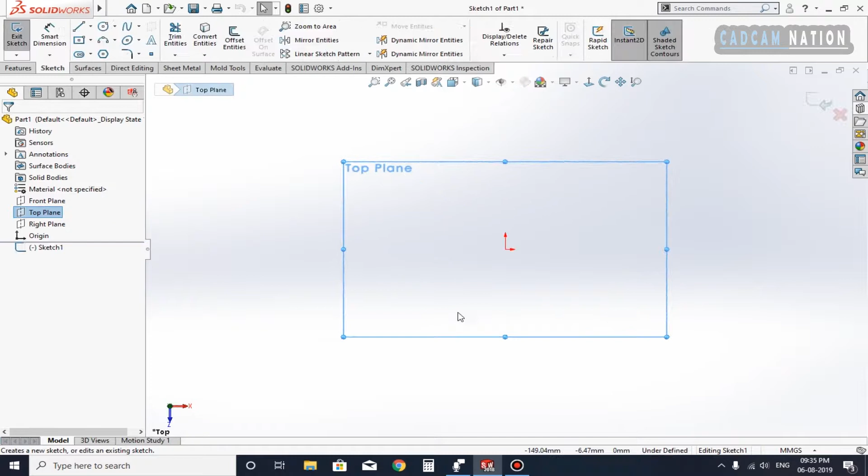As you can see, I'm in the SolidWorks interface. As you already know how to start it, I'm going straight to the tutorial part. On the left side you can see there are front, top and right planes. There is a top plane, I'm going to select it, and there is the sketch option available. Click on it, it will align to your normal view.

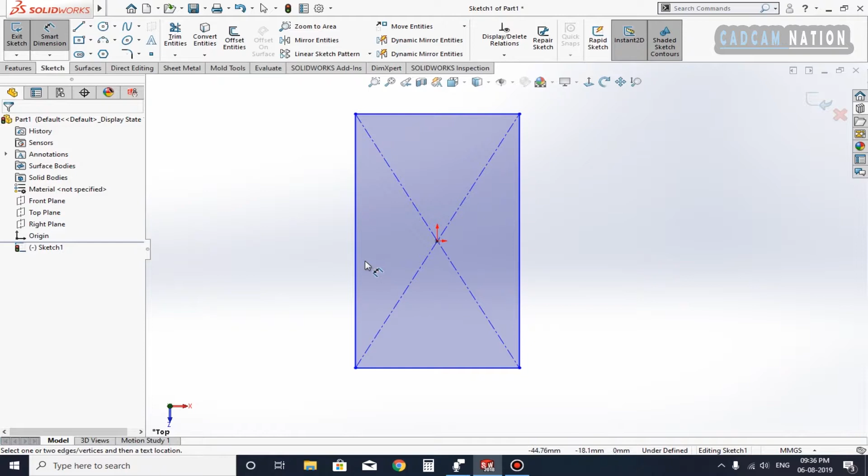The first type of joint I'm going to show you is the half joint. For doing this, I'm going to use the sketch option, and using the rectangular feature, click from the center and draw outwards. Then give the dimension - there should be a horizontal dimension over here. I'm giving it 24 millimeter.

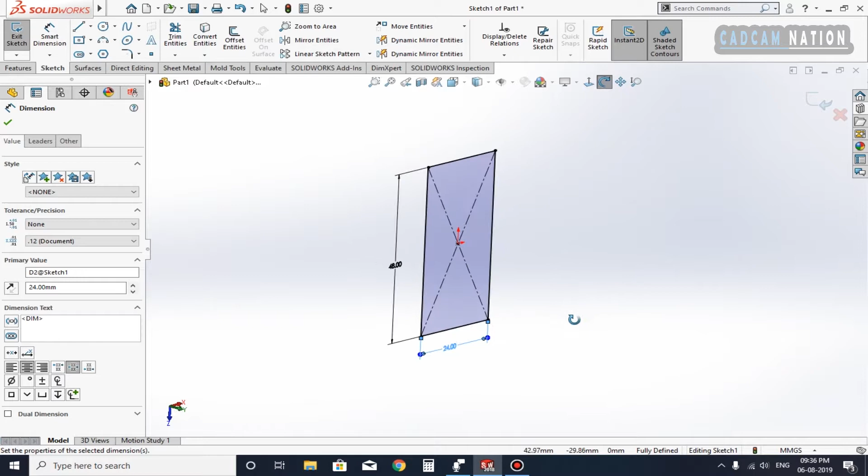This is the basic foundation of this sketch. I'm going to extrude this feature, so go to feature and extrude it, extrude this equals to 80 millimeter like this, and click OK. Now we have the wooden piece.

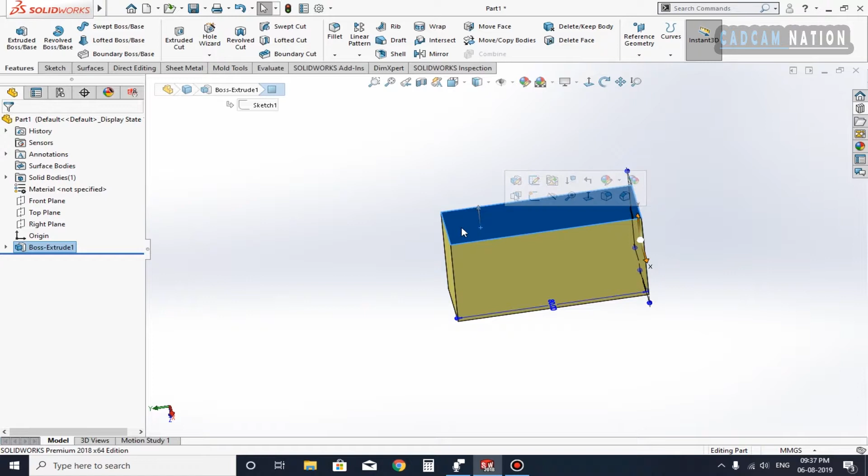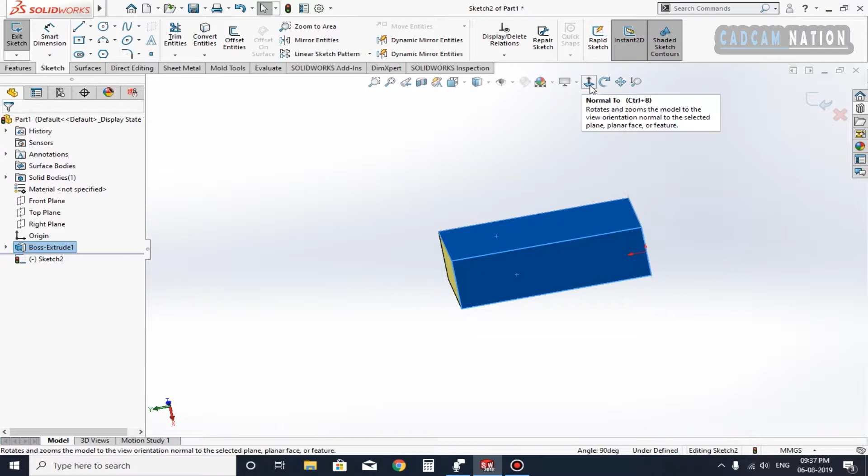Start on the surface, click on this surface and click sketch. One more thing - when you hold down the control key and click the surface which you want on your side, and the other surface which you want on top, then hold down the click and select this surface, and when you click onto normal, it will normal as you want.

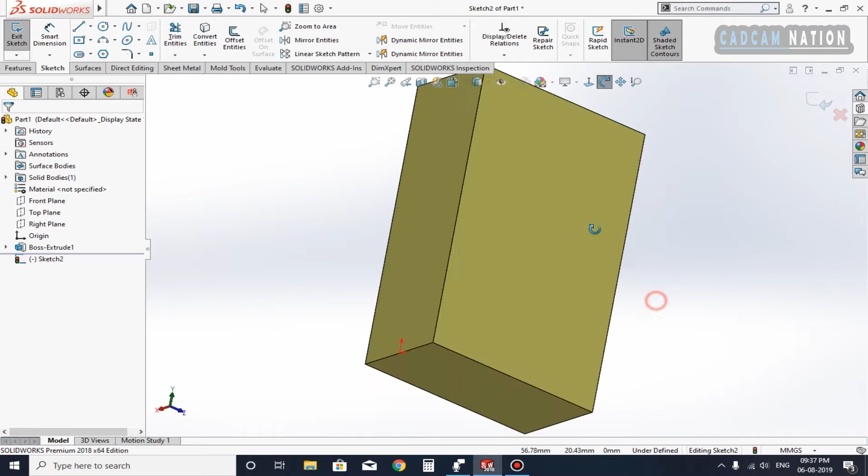No matter the orientation of the origin, you can also change the orientation of the sketch according to your requirement. Select the surface by holding down the control key, and the second surface which you want in upward direction, then click like this. I want to make it horizontal, so click like this and make normal to view.

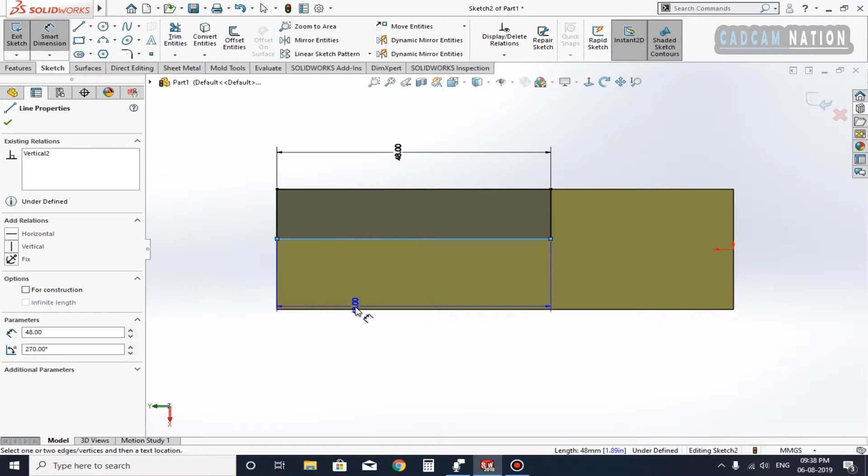I'm going to start over here, make a rectangle from this corner like this, give the dimension equals to 48 millimeter, and the thickness of this cut is going to be equals to the leftover material, exactly 12 millimeter.

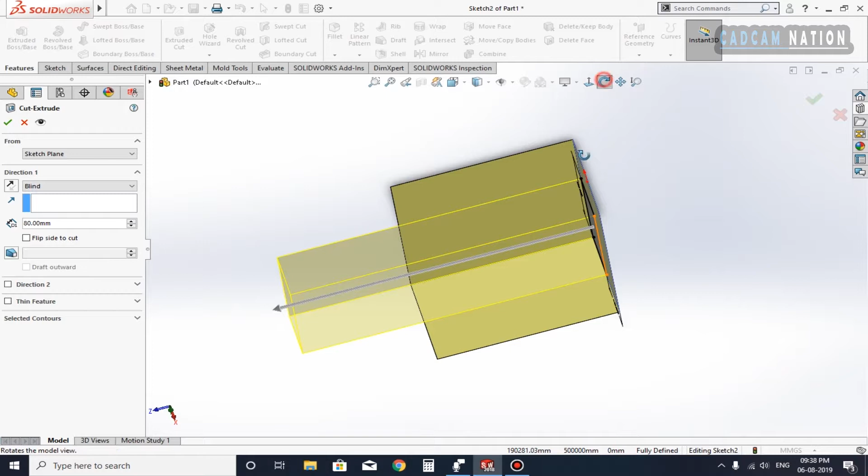Now I'm going to extrude cut, go to feature and extrude cut. As you can see, it is just there. Select the origin or vertex you want, or simply double click the surface up to which you want to extrude cut. Click - so this is the first half of the joint.

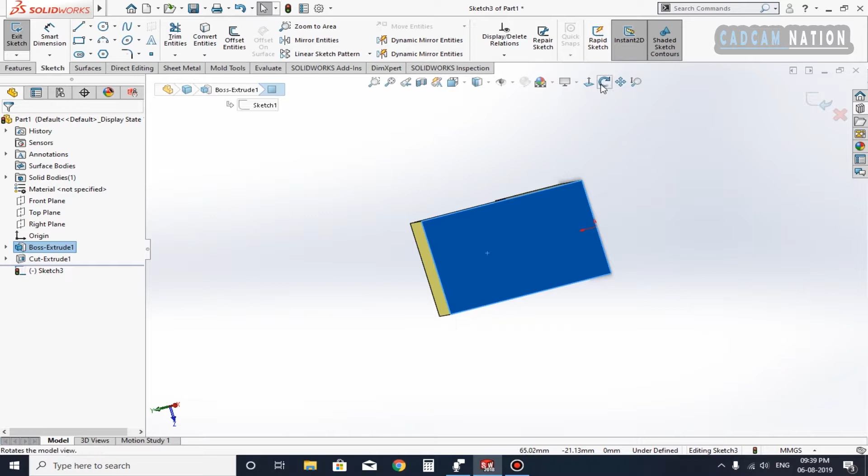To make another part, all you have to do is click on the surface. Let me show you which surface I'm going to select - select this surface and sketch, make it normal to your view. I'm going to change the visual style, so I'm going to start making a rectangle like this.

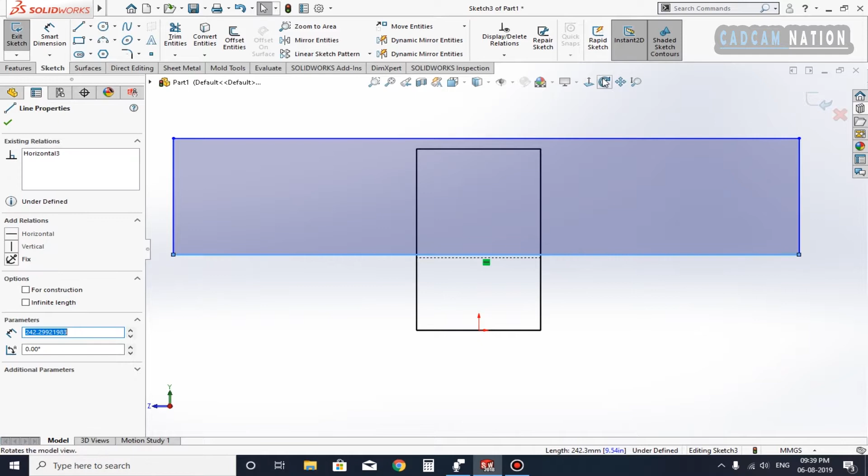By holding on the control key, select the line and the other line, like this one and this horizontal line, and make it collinear. In the same way, you can do this and this line, and make it collinear as well.

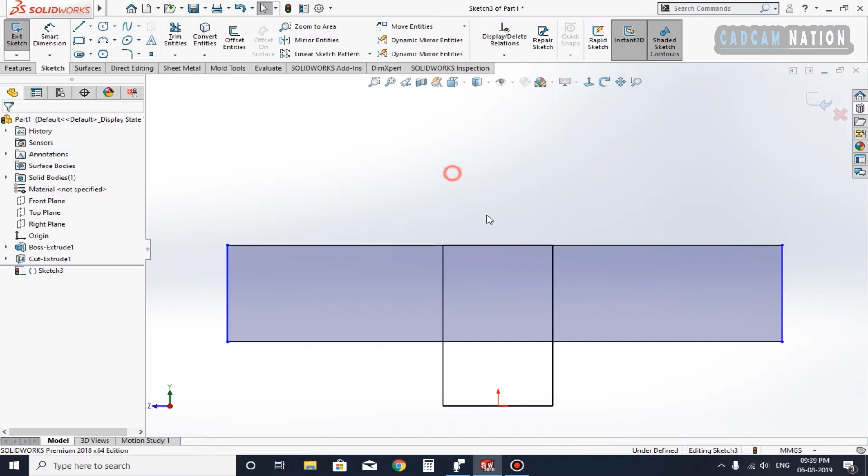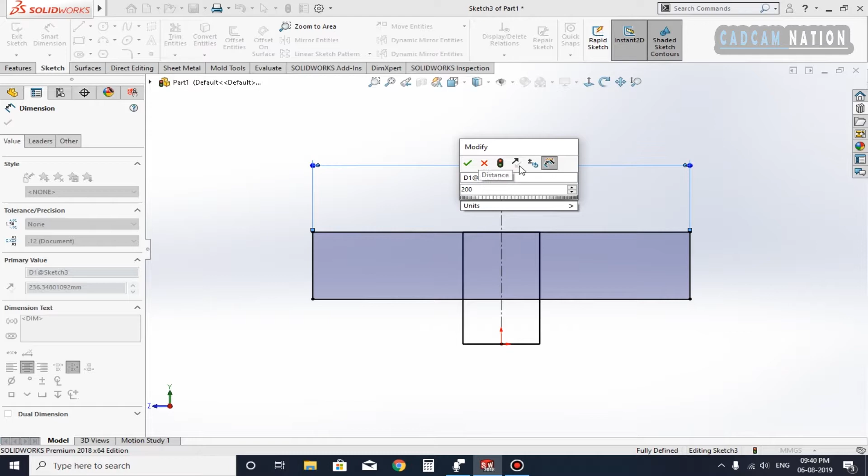Now make a center line from the origin like this and make it symmetrical. Click OK. You can also give the length - any length - in this case I'm just going to give it 200 millimeter like this. Now change the visual style.

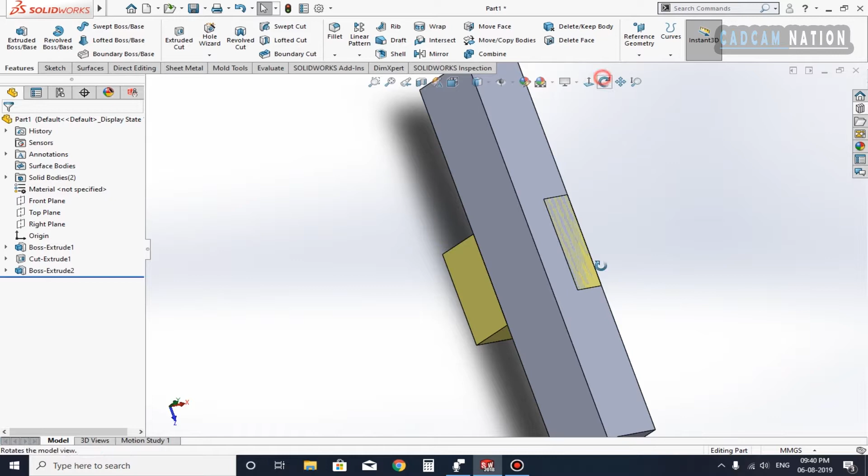Now I'm going to extrude it. Go to feature and extrude, and double click on the surface up to which you want to extrude. Make sure you uncheck the merge result like this. Now as you can see, it is overlapping each other, so to make it perfect, cut extrude.

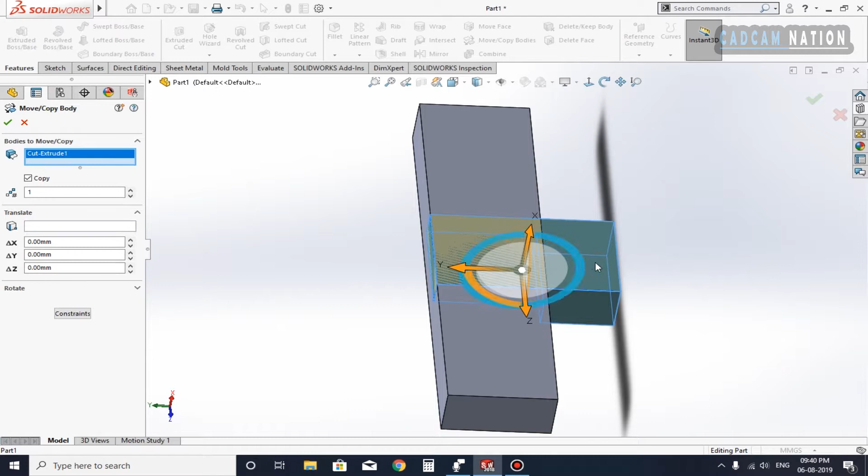Make a copy of this feature - for making this, click onto move and copy bodies. Now they want you to make copies, so make sure you check this copy and the number of copies you want. In this case I need only one copy, select the body and click OK. It will give you a message that you didn't move the body, which is perfectly alright, so click OK, you don't have to bother about it.

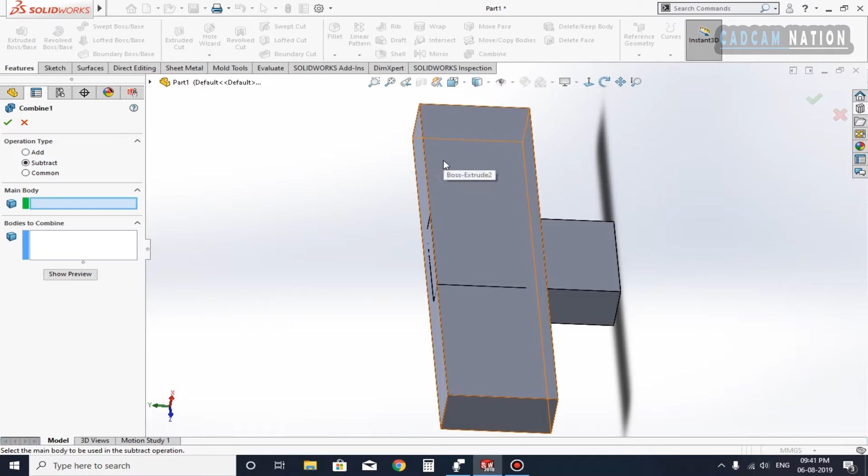Now go to combine and select subtract. The main body in which you want to create the recess - click on it - and the body to be combined is the body which we want to subtract from it. Select it, then click OK.

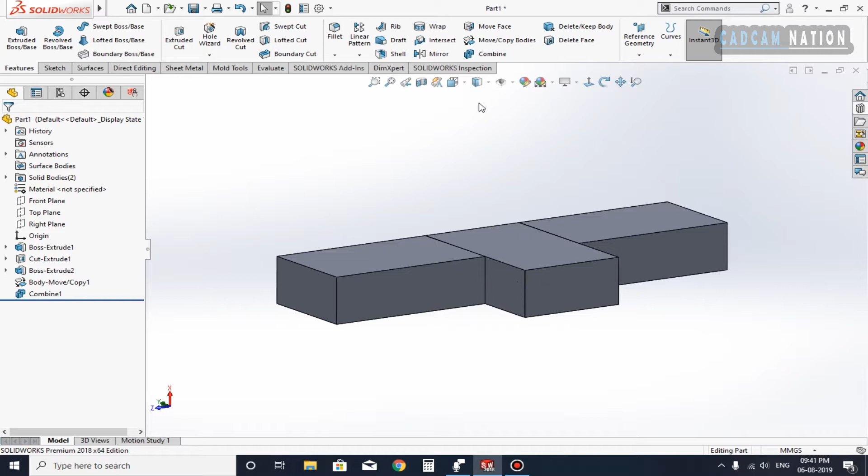Now as you can see, we have perfectly cut or made the halving joint. This is the halving joint in the wood. Let me show you this more clearly. Do like this.

Okay, there we go. Now you can see we have the lap joint, or you can say the halving joint. There is one more joint I'm going to show you, the dovetail halving joint. So how are we going to make this dovetail halving joint?

Let's jump on to that tutorial now. I'm going to start again with the top plane like this, and create a rough sketch, giving it a dimension equal to 48 millimeters, and a thickness of 24 millimeters like this.

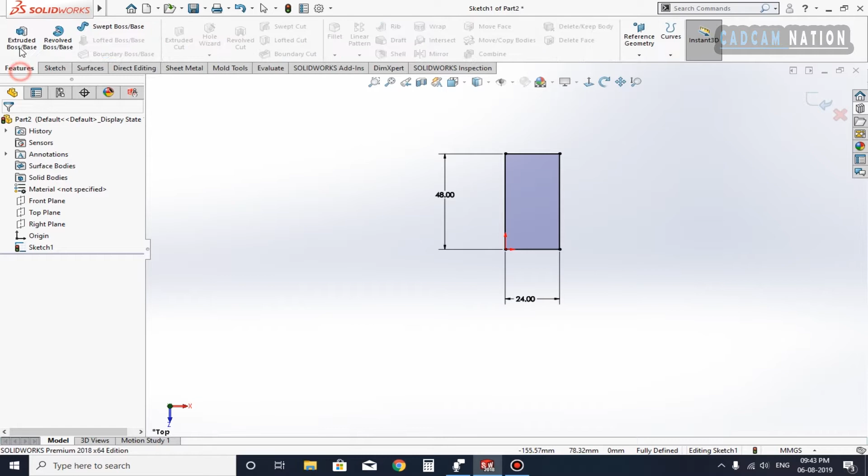Now it is time to make the extrusion. I'm going to extrude this feature to about 100 millimeters of wood. On that surface I'm going to create a sketch and make it normal to the view, for creating the dovetail halving joint. For doing this, I'm going to create a center line first from the center of this feature to this point.

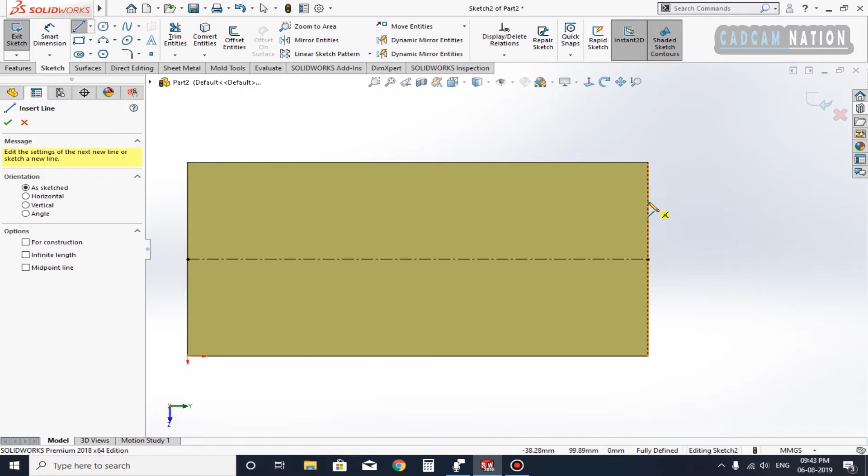Now it's time to make this—we already have it, so I'm going to click on this edge and convert the entity. Now it's time to make a dovetail feature like this.

Now hold down the control key, select the two lines and make them equal. Now also make them horizontal, so make sure it is symmetrical on both sides.

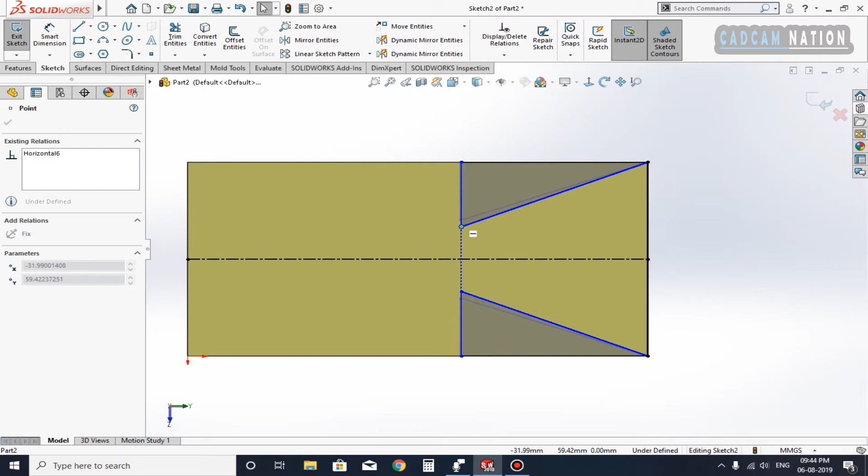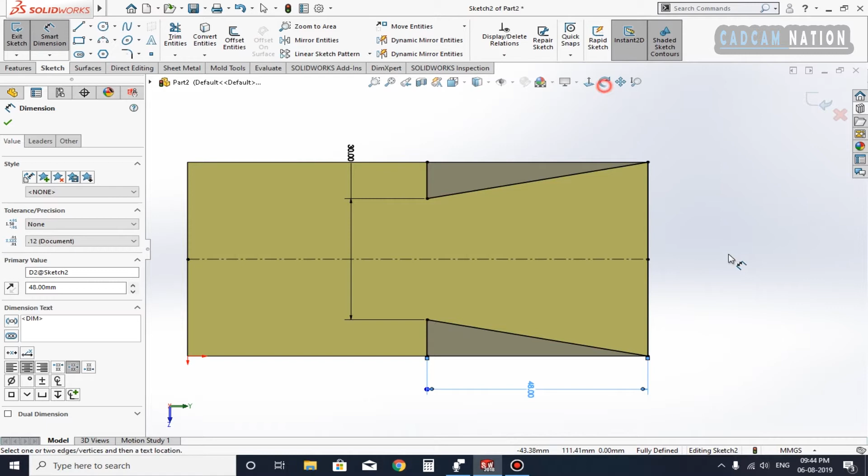Now you have to give it the dimension between these, so I'm going to select these two lines and make it equal to 30 millimeters, and the height is going to be 48 millimeters like this. As for how long the cut should be, since we have to cut it through, select 'through all'.

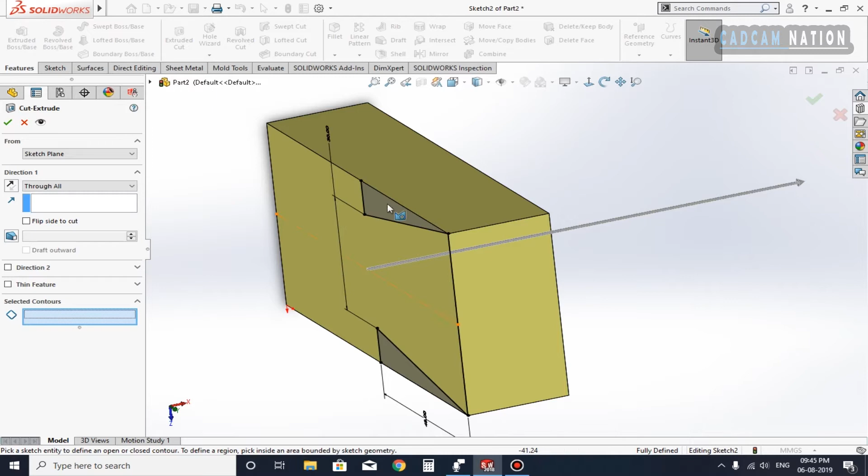So in the bottom left you can see the selected contour—you have to select the contours like this. Click OK. Now again select the top surface and click sketch, normal to view.

I need to make it something like this. Now again select the rectangle, starting from this position to this. Give it a dimension equal to 12 millimeters, for material to be left on the body, like this, and click OK.

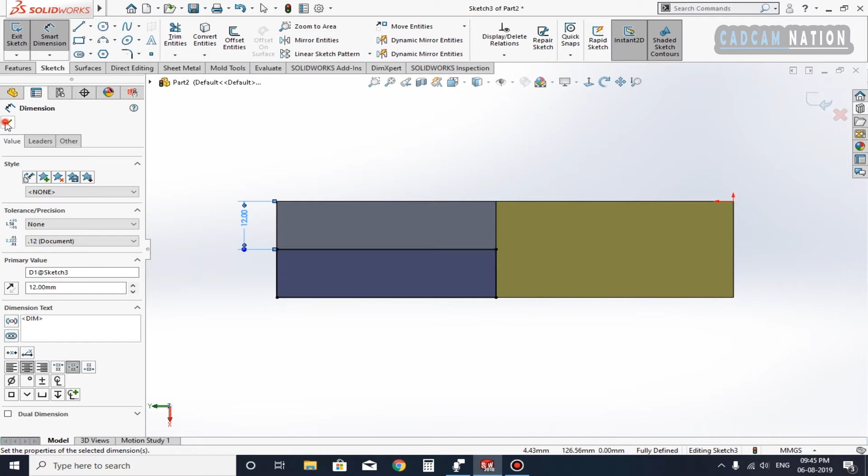Go to feature and extrude cut, make it through all, and click OK. So this is the first feature we have just created.

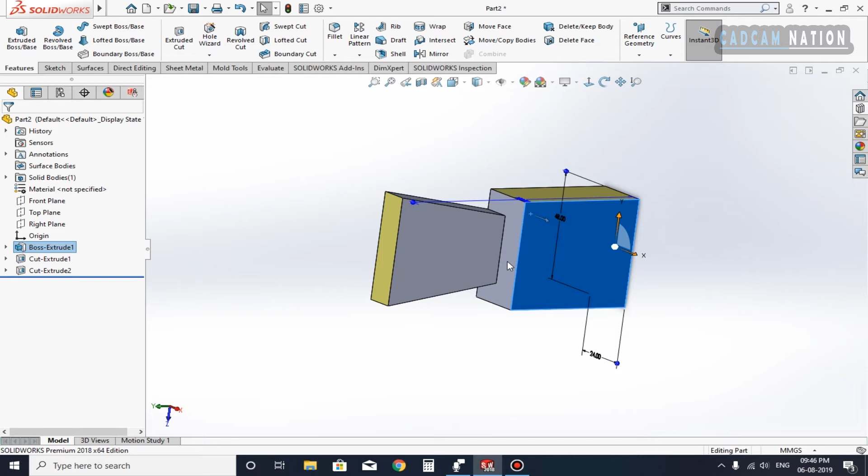Now it is time to make another feature in which this wooden part is going to be completely and successfully merged with the other. I'm going to start with the back surface, click on sketch, and rotate a bit. Now we are going to create a sketch.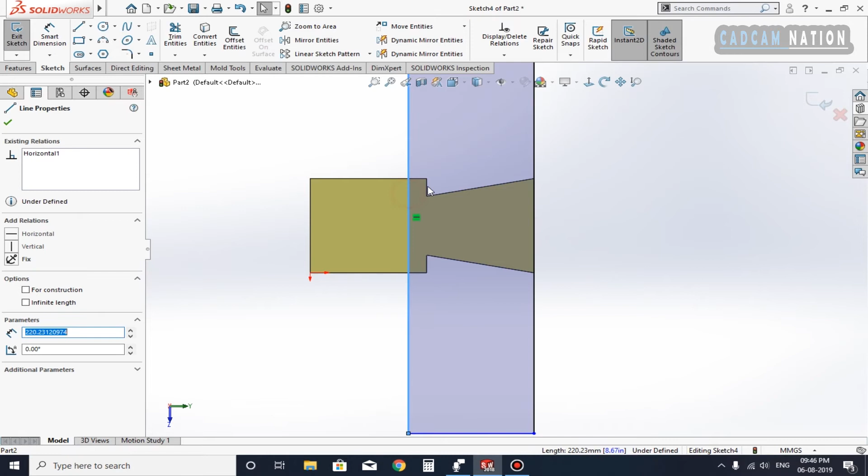Make it collinear. Again do this with this part, make it collinear. It doesn't matter how long you want this—roughly you can make it 200 millimeters.

It can be anywhere on this line, it doesn't matter. If you want to make it symmetrical, you can simply draw the center line and make it symmetrical like this. Now it's perfectly on the center.

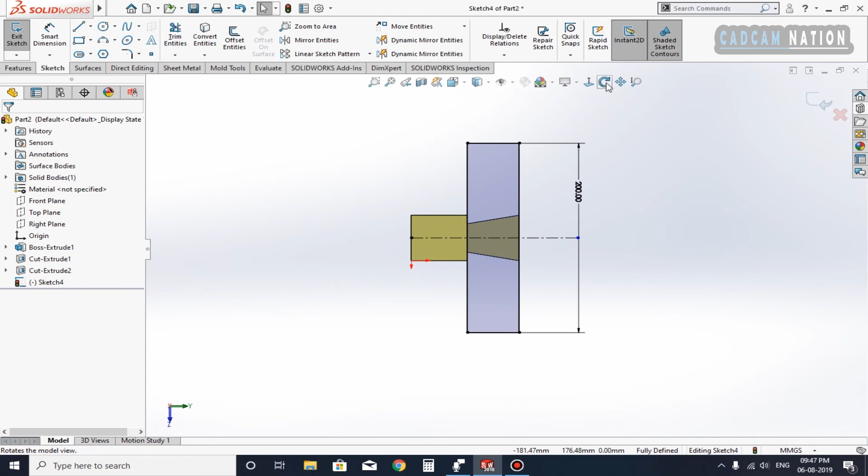I'm going to again extrude the feature, change the direction, and again make it through all. Make sure you uncheck the merge result and click OK.

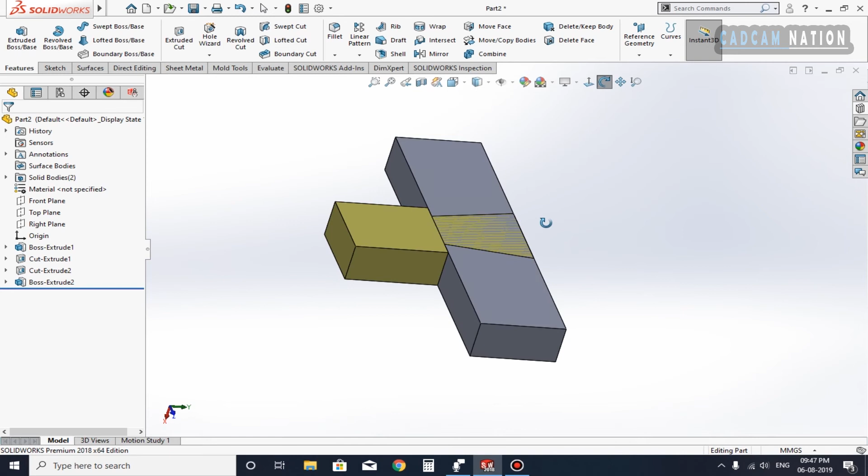Now again repeat the process we have done before. Go to move and copy bodies, select the body, and click OK and OK.

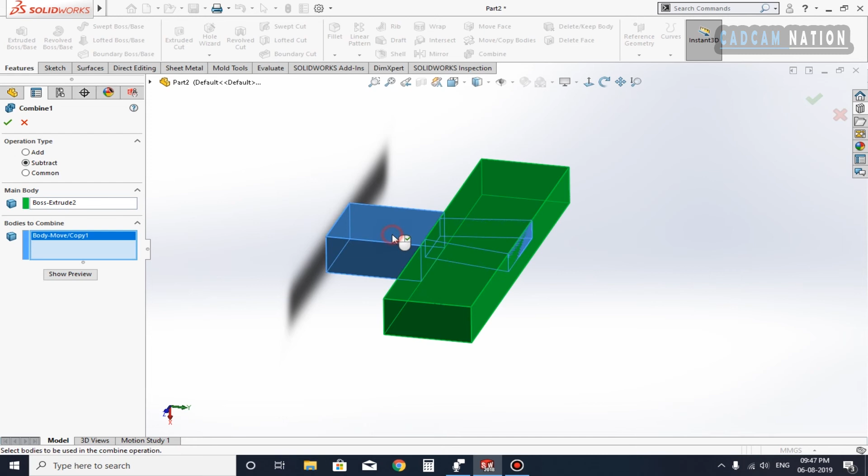Now it is time to make the combine feature, or subtract it. Select the subtract—the main body is this, and the cutting body or tool body is this—and click OK. Now as you can see, we have successfully created the dovetail halving joint as well.

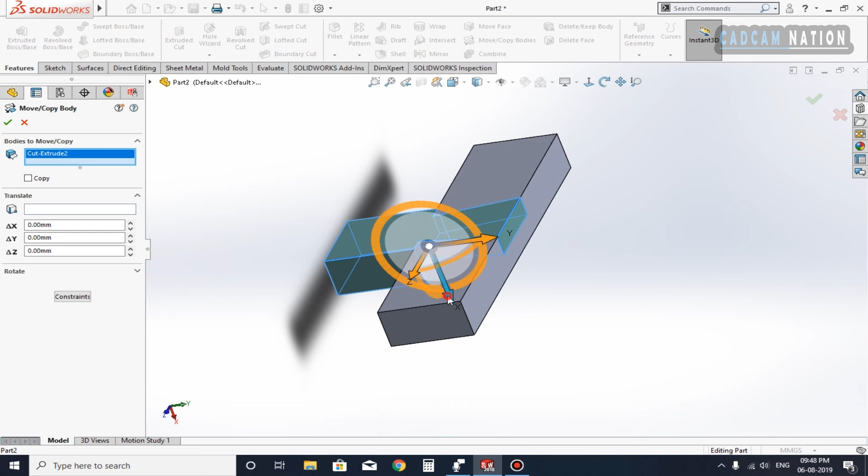Okay, you can also move the body from here. Make sure you uncheck the copy feature, and you can move this body to make it more clear what we have just created. As you can see, this is the dovetail halving joint we have just created.

In the next video I'm going to show you how to make a mitre faced bridle joint and a lapped dovetail joint. If you want to see the next tutorial which I've just told you about, let me know down in the comment section.